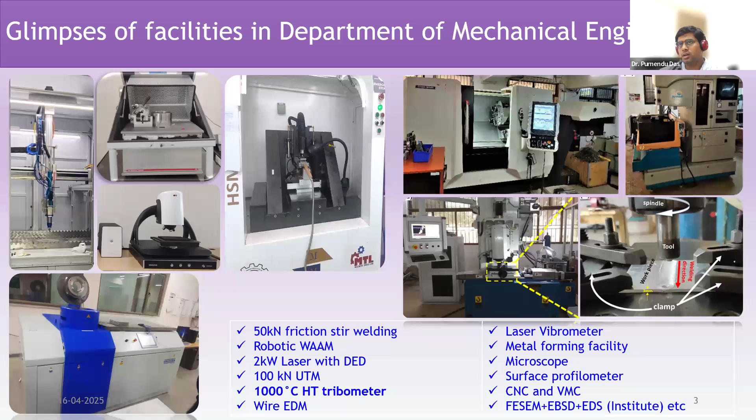Coming to the departmental facility, so I'll mostly talk about that. Our department currently has 12 faculty members working in different domains of mechanical engineering. Among the facilities we are having currently are various types of manufacturing facilities, including a micro machining center and laser-based additive manufacturing setups, two different types of setups. We have extensive characterization facilities, including high temperature tribology and optical profilometry, different types of microscopy, and all these things.

Coming to the institute level facilities, our institute has also established a central instrumentation facility, in which we have advanced NMR, XRD, FESEM, AFM. We have stereolithography setups, and we also have a TEM. So we are hoping to build up a very exclusive research facility in the central Indian zone. We hope our listeners will also be able to benefit from this.

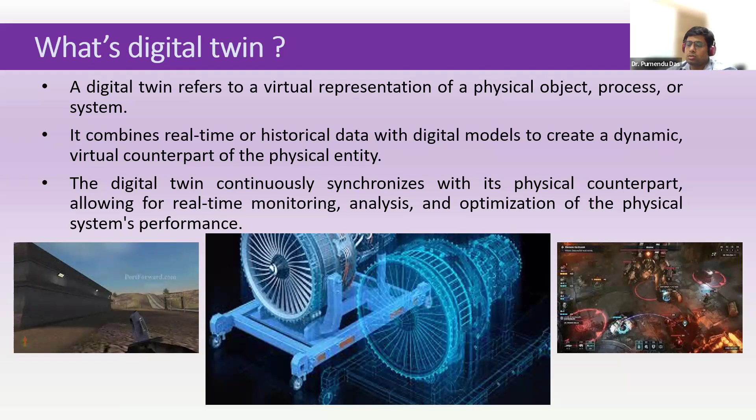Let us go forward. Why are we talking about digital twin? Because it provides a representation of the operational data. At any point of time, one of the most important and interesting features of digital twin is it provides a very good representation. We will see a couple of representations when we talk about a test case where we see a robotic arm being monitored using a digital twin. It takes in the database and analyzes the whole data.

It creates a historical trend input from the previous data. And because it has the data backup or database, it can also identify potential causes of deterioration in performance. So all of this we can identify using a digital twin.

Support for decision making and optimization for day-to-day operations. This is a very trivial feature of digital twin, and also the most handy feature as well.

It also identifies any abnormal behavior because it has the complete catalog of different behaviors of the system. So it can actually identify if there is any abnormal behavior, or some downtime is upcoming, or some problems may be faced by the system. So it can identify that.

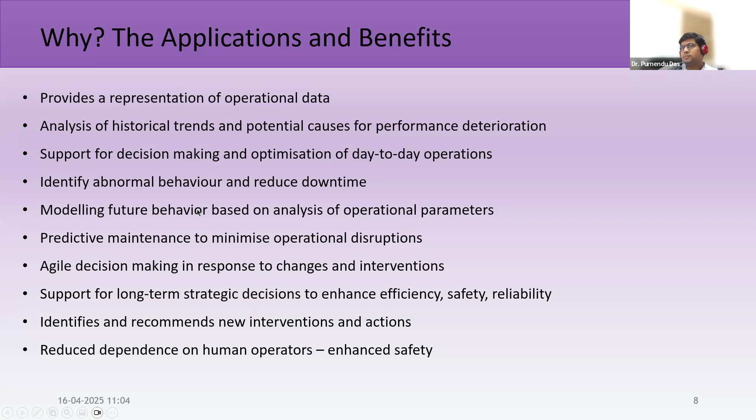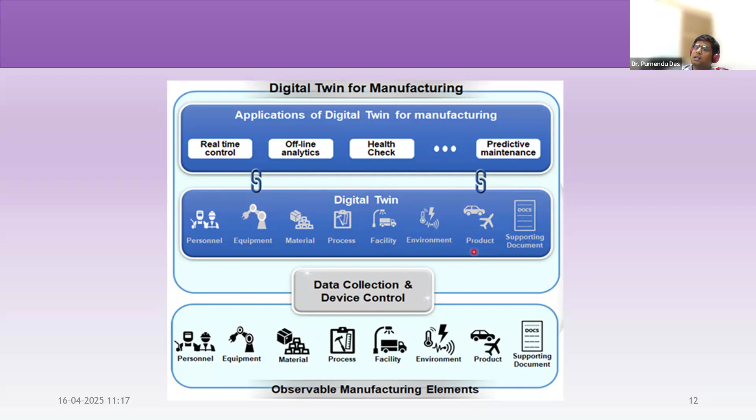Monitoring of these is also very important because our ultimate target is manufacturing, and we want to improve manufacturing quality. So information about the quality of the final product has to go back to our analytics block, to make it aware what outcome we are getting at a particular parametric set or condition of working. This is basically something we need to observe.

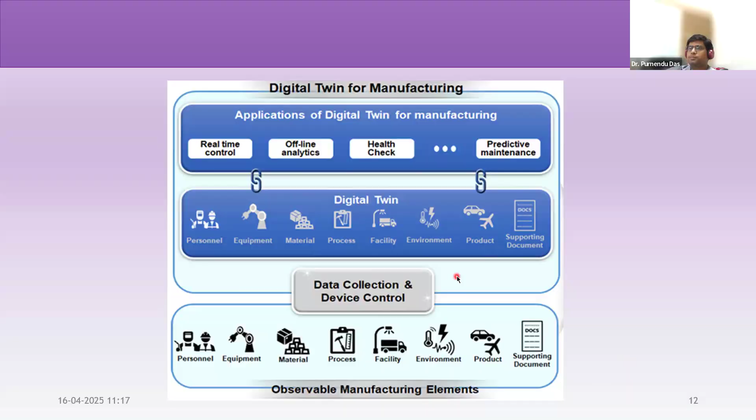Now coming to the next block, I'm trying to give an overview of what kind of features should be present in the digital twin.

We need a cyber-physical system based machining system, and the digital twin technology has to be properly developed. This whole block of digital twin technology once again consists of analytics, networking, and understanding of the physical system. Once we can do that, we can have IoT-enabled real-time data acquisition.

Why I bring in IoT here is that the data acquisition has to be appropriate and as detailed as possible. Wherever or for whichever objective I want my digital twin to be utilized, I need an appropriate set of data backing it up.

Advanced human-machine interactions will be required, but this has to be limited as much as possible, and we need cloud-based solutions. As we understand, for most digital twins of manufacturing systems, the shop floor environment is bound to not be compatible with cyber systems coexisting directly.

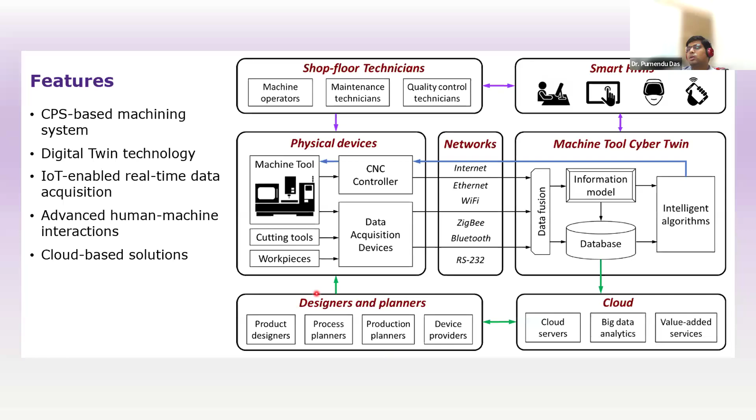So, more or less the same thing. We are talking about schematic constructions. Here, what we're starting is I will slowly move to one of the specific test cases. So we will start discussing a test case. This slide I'll come back to in a minute. Before that, let us quickly see.

So the schematic of the digital twin is here. We have a monitoring unit, an analysis unit, a simulation unit, and a management unit which does the comparison job with the simulation results. This analysis and simulation can be clubbed, as I was discussing. Once we have data analytics, we don't always need the simulation to be true, but we can always have the simulation and compare it with the analysis for better understanding of the system.

Now, this gives us characteristic profiles of different kinds of machine parameters or data with respect to other outcomes. So the information I'm getting from the physical system is the materials, dimensions, different process parameters, spindle speed, feed rate, and G-codes to operate the system. All of this is fed back from the physical system to my digital system. Apart from that, corresponding to this machine data, we have sensory data: current, vibration, temperature, acoustic emission, force, proximities, positions - all measured in real-time and sent back.

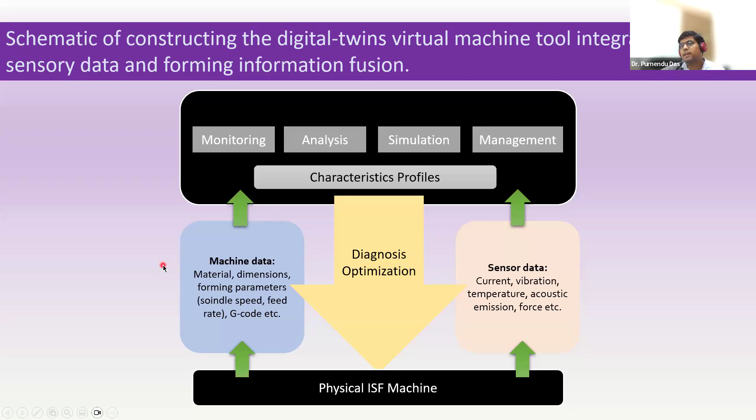So let us see in a little more detail. We have various steps in this process. We start with identification of the requirements. This is very important, because the network of sensors has to be established along with the physical system - what kind of sensors do we incorporate? If we want the surface roughness to be smooth for any particular product, we provide measurement of surface roughness, or measurement of vibration, or measurement of force. We try to identify those parameters or features of the process that affect our target requirement. So the first stage is identifying the information I need to gather.

So if we decide we need a smooth surface, I declare that my purpose is to get a smooth manufactured surface out of a system. Based on that, I identify what data is needed - whether it's force data, tool wear data, or temperature data. All of this I identify from my system understanding, and ensure that my sensors are placed properly within the physical system. We also identify what constraints exist in the identification of some of the sensors.

So once this stage is done, in the second stage we start collecting data, because our sensors are now in place. These sensors start giving us data, and we start storing the data in the cloud. Once the database is formed after a certain amount of machining or processing, this database is used to create a data model, which is interfaced with the physical system.

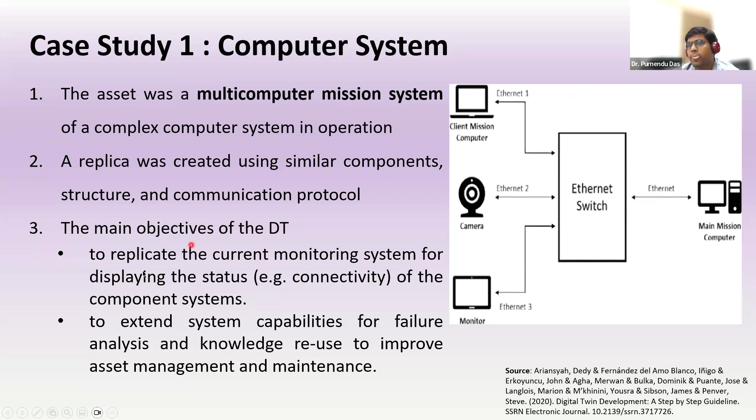Here I have just noted some of the processes. I'll speed up a little so that we can go for more relevant physical systems. From this, we can actually create an action plan out of the digital twin using proper analysis, as I have discussed already before.

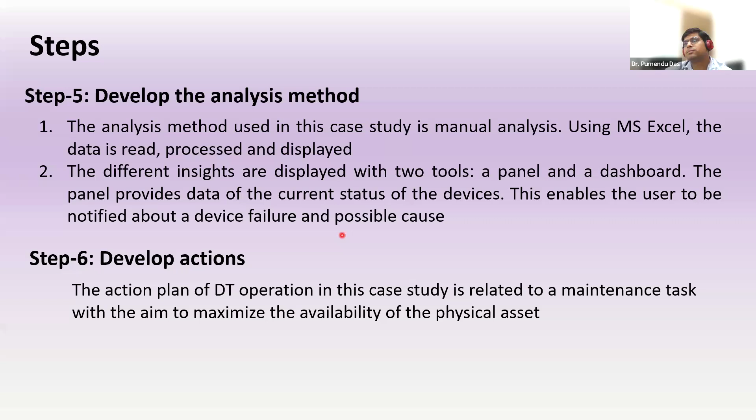So this is the computer-based system. It will provide us the verification of the data, the information that I'm giving, so whether all equipment is installed or not. It may so happen that my computer shows that one particular Ethernet is not working because it is not installed properly. So it will do all the checks and ticks, and provide me the information about the functioning and non-functioning parts.

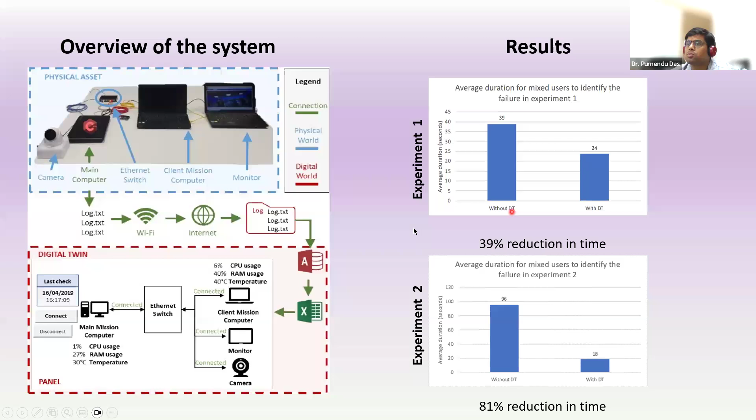It has been observed that the downtime, or the time when the machine is not performing, can be reduced up to 39-40% with the use of digital twin. So in case of an automotive factory...

In another case study, the automotive factory's goals are set as keeping the production line in optimum condition, meaning we want a specific flow of output or product. That's number one. Number two, we want analysis of the life and durability of different produced materials, as well as the life and durability of the components participating in the system. And we need to enable an immediate response when an emergency occurs, understanding the severity of any parametric variation, and then taking decisions based on that using our digital twin. The testing and managing of different scenarios as virtual data can be provided.

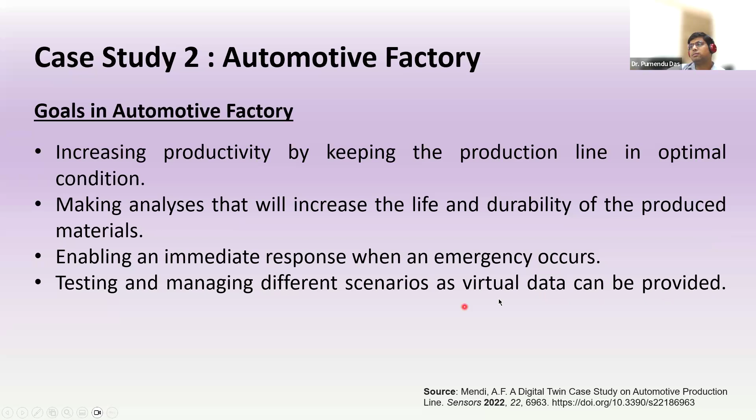So let us see how it is being done. What we are trying to do here is identify four verticals. The first one is...

Monitoring and analyzing the temperatures of motors in the robotic arm. We have a robotic arm participating in activities in an assembly plant, and we are trying to monitor the temperature, because we know for sure that if the temperature goes beyond a certain point, the effectivity or working ability of the motor falls below, the productivity starts to go low, and beyond a certain temperature the motor can have severe malfunction. So we have this as one objective.

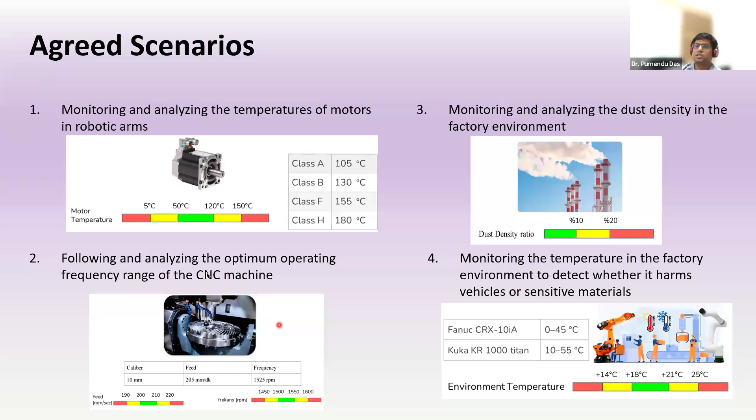We can have another objective where the dust in the factory environment will be monitored. A third objective where the temperature in the factory environment, the outside or ambient temperature, will be monitored. And then any kind of frequency or vibration present in the system will also be monitored. Let us see what kind of sensors we can have - temperature sensor, dust sensor, and then vibration and force sensors.

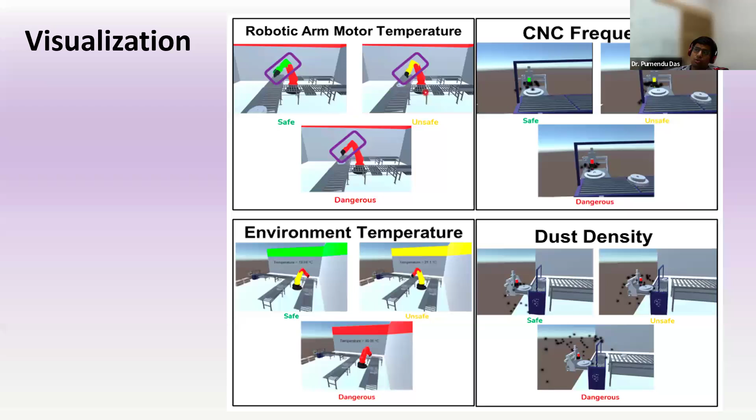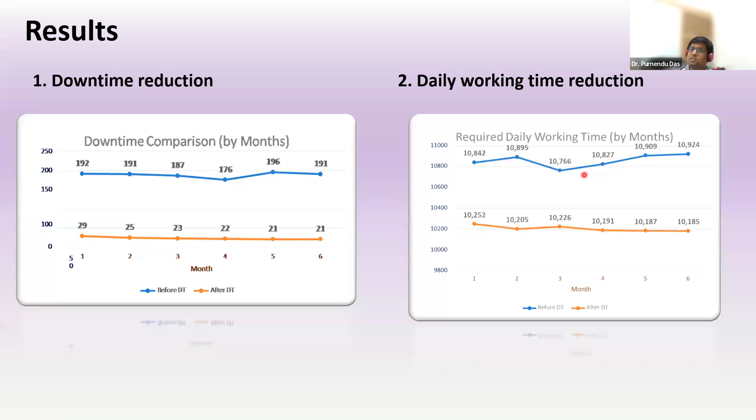With this experiment, it was observed that a huge amount of downtime reduction was possible, as well as working time reduction by a large amount. Working time reduction means that the same productivity was achieved within much lesser time compared to without a digital twin. So observation of the system, identification of downtime, or identification of any anomaly in the system all become much easier when you have a digital twin in place.

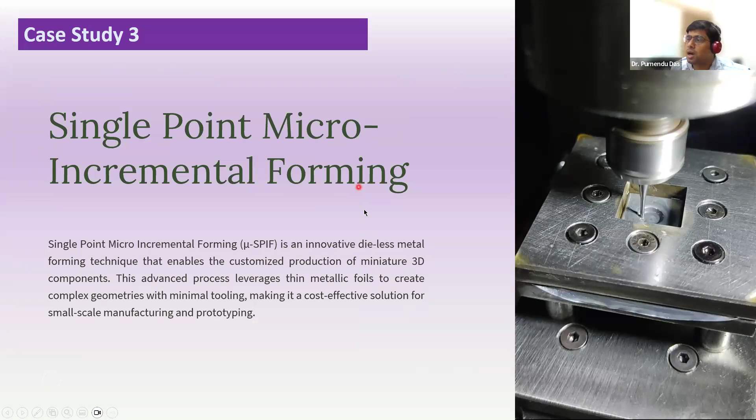Now coming to the last part and last case study. This is a glimpse of our current research. We are working with single point micro incremental forming. What we are essentially doing is using a micro tool with a round or hemispherical tip. The tool is pressed onto the workpiece material, and through localized deformation, we are creating a sample. This is a standard SPIF process.

For our purpose, we are using a high spindle speed. For this, we are employing a micro machining setup where the spindle speed can go up to 70,000 to 1 lakh RPM. We are using a very thin sheet of aluminum, and a micro tool of diameter in the range of 1 to 2 millimeters, to deform the sheet and find out the formability of this sheet under certain processing conditions.

So our target for this digital twin making or this research is to understand the failure points of these sheets, right? We are trying to identify at what point of time or at what parameter we will have a failure.

We started experimenting and saving the data. Two types of information were saved. First, formability data was collected - at what point of time or at what depth of deformation, you can see here, we will find a crack either in the wall or at the base of the sheet. If we find a crack, that means that is the limiting height to which we can deform the part. This was measured after the experiments and fed to my data cloud.

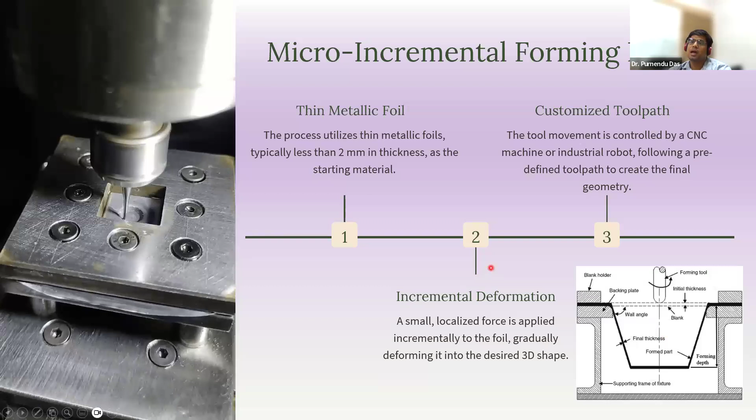Let me quickly show you the experimental setup. This is the micro machining setup in our department, which has the capability of rotating the tool at 1 lakh RPM. Micro tools are typically below 1 mm in dimension, but in our case we are using up to a 2 mm diameter tool. We have created a special fixture that can hold a very thin aluminum sheet.

The sheet thickness is below 50 micron, and with the help of a dynamometer, we are measuring the forces. Post experimentation, we measure the height using an optical profilometer. However, the positional information from my tool can also be considered as the height measuring information. The machine has a continuous force measurement system which stops the machine as and when the force goes below a certain value.

This basically allows us to actively track the failure occurring in the sheet. So whenever the failure is occurring, the machine is stopping automatically.

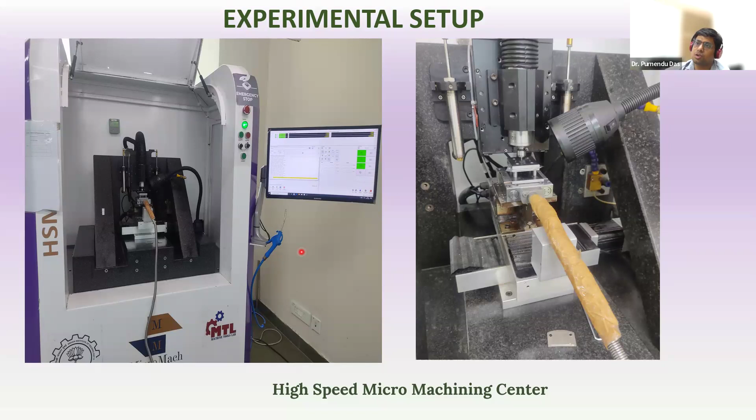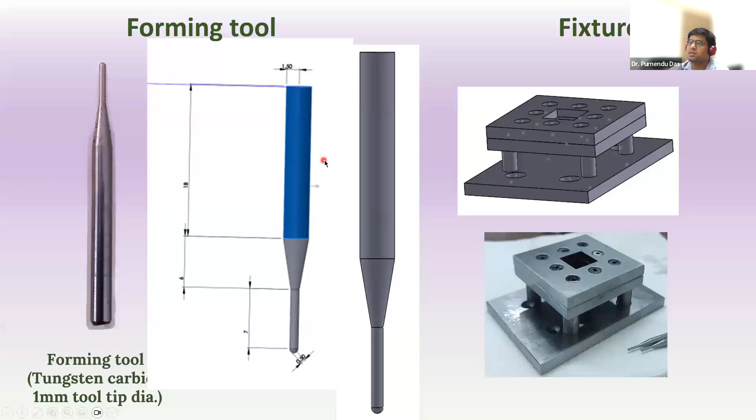We continued this research. This is the tool diameter, exact tool diameter of 1.5 mm, 1.5 mm radius, and this is the fixture. We use this fixture to create the tools, and the geometry, as you can see, is here.

We selected a few key parameters, which are wall angle, spindle speed, feed rate, and step depth, and we selected a few steps. So we did experimentation on all of this and then fed this data to my data model.

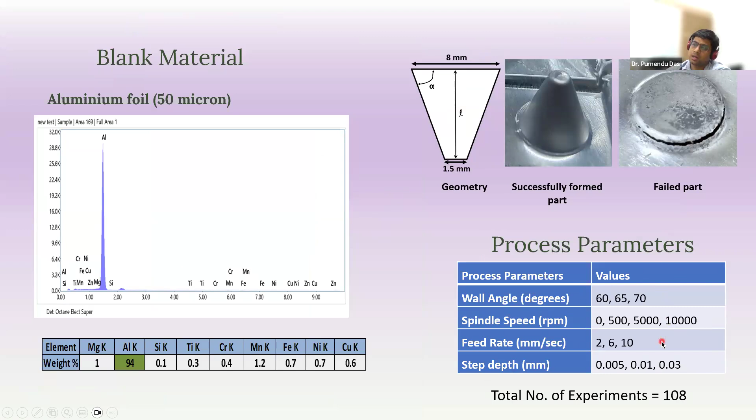How did we do the data model? We have used a data model. Before that, using the data model, I try to understand what is the correlation between the parameters, which are the important parameters that we need to monitor more closely.

What we can see is wall angle is, so these are the outputs. I measured the formability, forming height, forming time, and the surface roughness. So surface roughness gives me information about product quality, forming time about productivity, and forming height and formability about product capability.

Later, when we try to see the effect of different parameters on normalized scale, we see the correlation coefficients are high between wall angle and formability, whereas the feed rate gives us lower forming time, and step depth also gives us, so step depth and feed rate has a negative correlation with the forming time, and has less correlation with the forming height and formability.

Going forward, what we could do is relax the feed rate and step depth from our further modeling, because we know that the correlation between step depth and feed rate when looking at the forming height is much lesser. They don't have much effect on the forming height, so we can relax those.

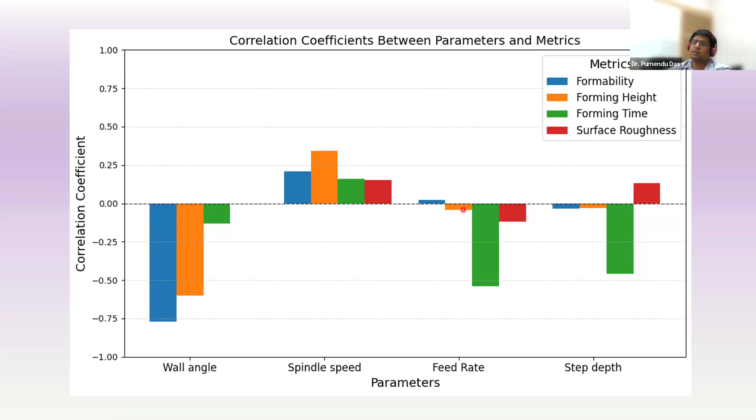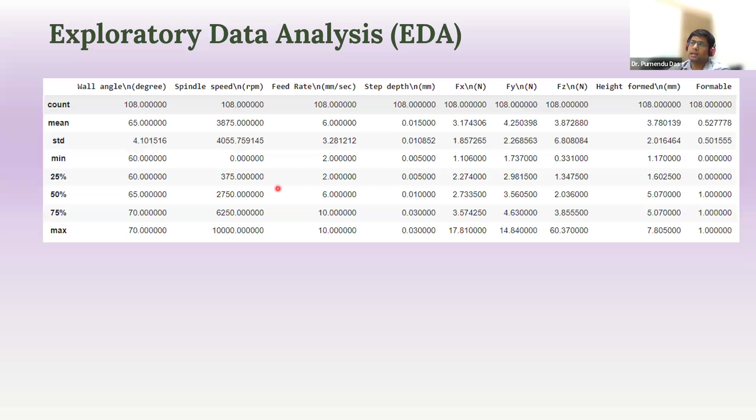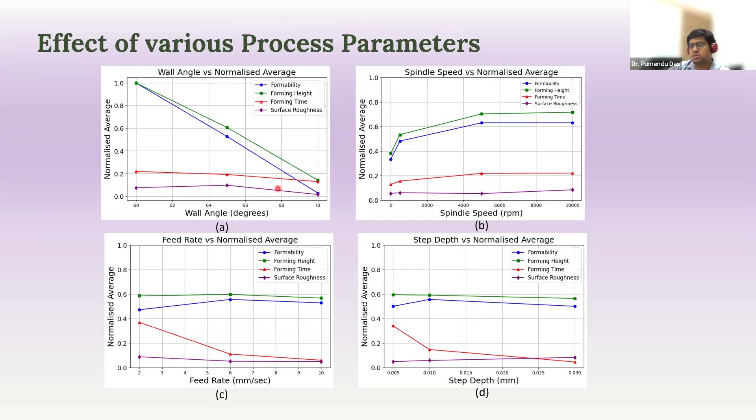We use the whole data, and then using this data, we try to plot the parametric settings. This gives us a decent amount of understanding about the process, the physical understanding of the process. However, our intention was to create a digital twin.

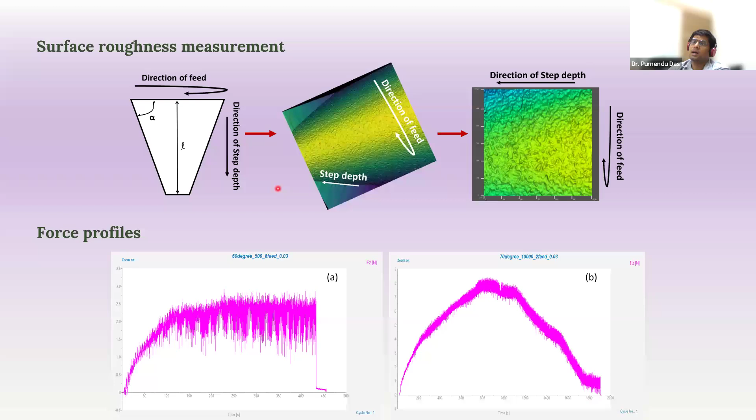I'll go forward, and here are some examples of how the surface roughness and the force plots where force was measured. And here, what we did was we created an ML based regression model.

We explored around 32 regression models from different structures and architectures, from which we selected these four. These four models provided better performance in correlating the parameters with the outputs. Then these models were used to optimize the R square and RMSE values with respect to the wall angle, spindle speed, feed rate, and step depth.

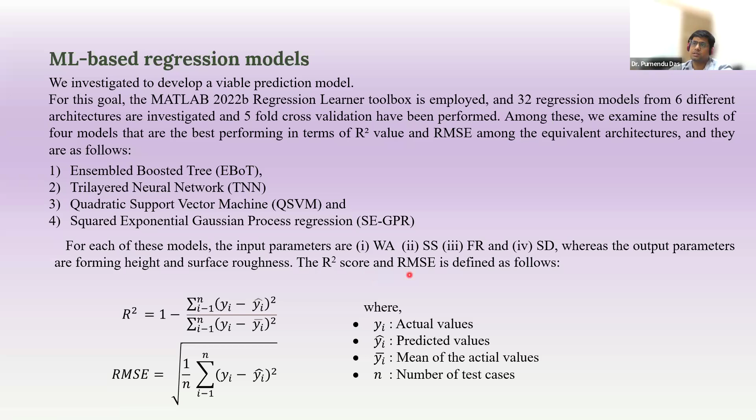These four parameters were connected with my surface roughness and forming height. The R square and RMSE was used as a metric to monitor the closeness of fit. When we went forward, we saw that the QSVM was showing lower R square value, but others were showing very high R square value, showing a very good prediction for the heights.

When doing this, 70% of the total data was used to prepare this model, and the rest of the 30%, 20% was used for further training, and 10% was used for the validation of the model. We saw that our model was decently working, and the prediction of height and surface roughness was possible from the parameters in situ.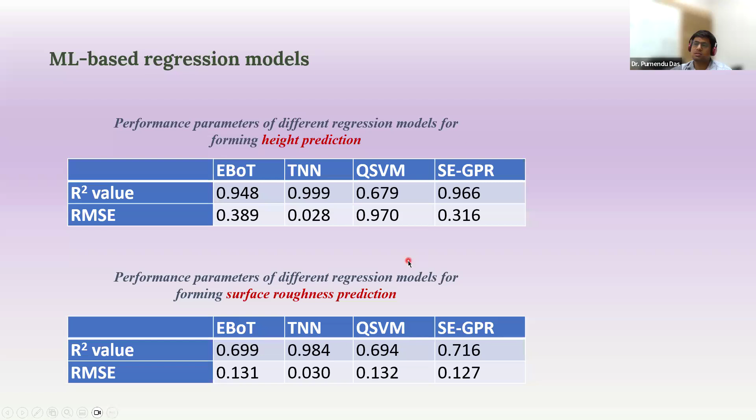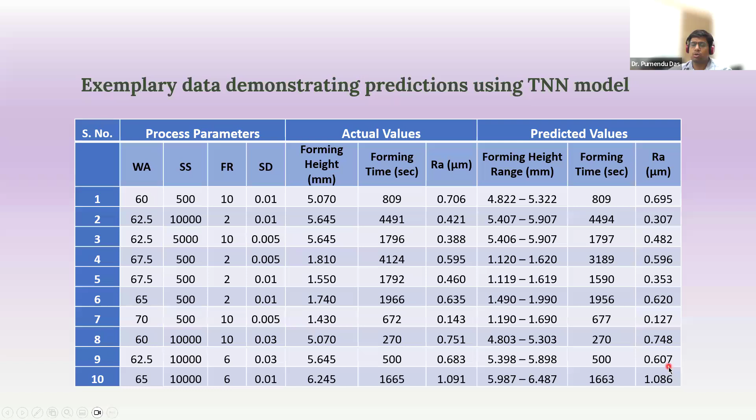This is one table that shows the prediction of roughness and the forming time with the given parameters. If the parameters are given to us, the actual value that I can measure from my physical system is this. However, if I'm using a digital twin that I have created by virtue of the ML model, that gives us data which is pretty close to the actual data.

So going forward, we will come to the conclusion of this talk now. The future of digital twin, what we can see is that with the expansion of IoT, we have various versions of digital twin technology.

Digital twin technologies are being employed in various products, and as the prediction was made around 2020, the prediction was around 2022: 85% of all IoT platforms will have some kind of digital twin, which is very obvious because IoT is basically standing on digitization and cyber physical systems.

So we will need digital twin to reach IoT and successful implementation of Industry 4.0. Apart from that, as we move towards smart devices, smart products, smart manufacturing, and smart components, we are basically reinforcing the idea of digital twin.

Often what we think is that digital twin is a wholesome representation of a cyber physical system. It may or may not be that. Maybe only a part of the physical system is converted into a cyber physical system just to monitor a specific corner of the process. If I want wholesome monitoring, then only we need a complete digital twin.